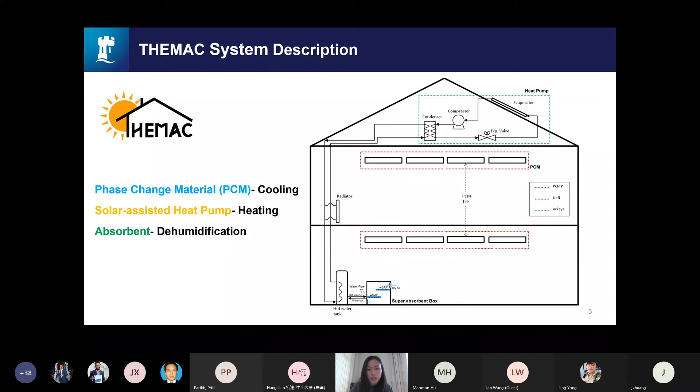And we have the super absorbent box containing the composite material to handle the dehumidification, and part of the heat generated by the solar assisted heat pump will be used to regenerate the absorbent. So the working principle of the THEMAC system is quite straightforward. It will be able to operate throughout the year.

In summer, during the daytime when the ambient temperature is high, the warm air in the building is circulated through the PCM panels. Hence, the heat from the indoor environment will be absorbed by the PCM cylinders as the PCM melts. In such a way, the PCM will enhance the overall thermal comfort in the occupied space by maintaining a steady indoor temperature within the comfort zone for longer periods, thus minimizing the time depending on the HVAC system and preventing overheating during the daytime, especially on hot days.

On the other hand, the absorbent will control the air humidity level of the building when dehumidification is desired. Throughout the day, the PCM will fully absorb the heat from the building. So in order to allow the PCM to work for the following days, at nighttime when the ambient temperature drops, fresh, cool air from the outside will be circulated into these PCM panels, causing them to freeze and release the stored heat from the daytime. Therefore, the PCM panels will become ready to begin the next cycle of absorbing heat again.

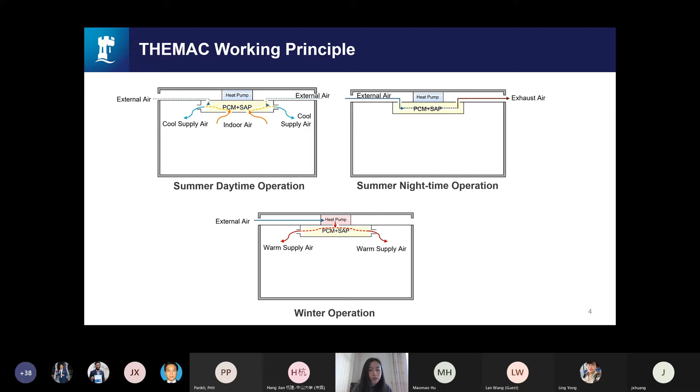So we firstly conducted research on the PCM material selection. Because the 3 key properties for any potential phase change material include suitable melting temperature, desirable heat of fusion and thermal conductivity, one of the key properties governing the initial selection is the melting temperature of the PCM. As stated in the literature, the suggested room temperature in summer would be 23.5 to 25.5 Celsius, and in winter it will be 21 to 23 Celsius.

As suggested by a lot of literature and research, the preferable phase change material melting point should be 1 to 3 Celsius higher than the average room temperature. So we consider the melting range of the phase change material would be 18 to 29 Celsius. This chart shows the market available PCM materials with melting temperatures in the range of 0 to 35 degrees. And because we have two phase change material manufacturers in our project team, we selected the material from their catalogue.

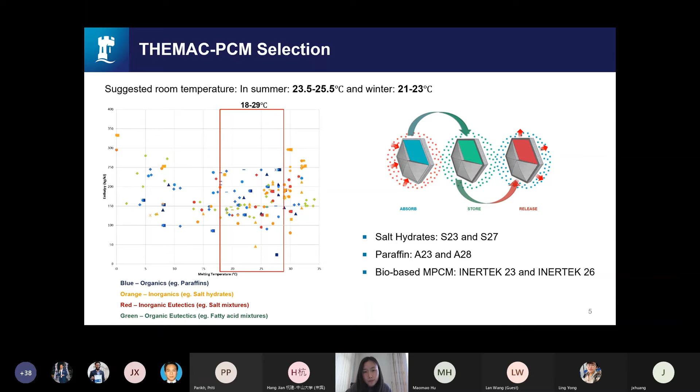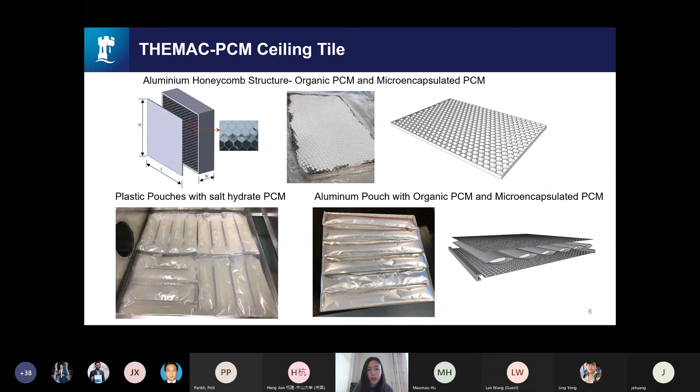So in terms of the PCM integration to the built environment, encapsulation is the common method. So we proposed and tested a lot of different designs to accommodate the PCM depending on their types. For example, we use the aluminum honeycomb structure to accommodate the organic phase change material and the micro-encapsulated PCM. And because the salt hydrate PCM is corrosive to the metal material, we use plastic pouches to accommodate it. And we also have a patented design called blister structure.

So it's similar to a medicine pill structure, but we filled the cells with the micro-encapsulated PCM, and then created a panel as seen in the photos. And the advantages of the blister panels are they are lightweight with more heat transfer surface area, and they allow flexible design and integration to the ceiling. And based on our testing, the blister panels did work to passively respond to the room temperature.

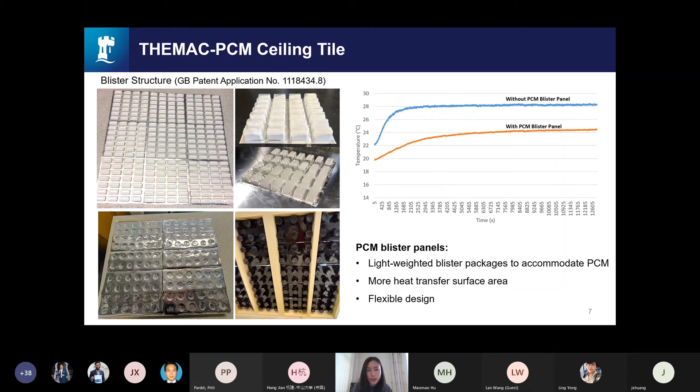And based on that blister design, we have finalized the final product design called ThinICE, worked with our industry partners, and here's the photo showing the overall view of the panel. So we use the HDPE module to accommodate the PCM, and then we integrate several heat transfer enhancement materials to improve the thermal conductivity of the HDPE module. And then we have designed it with more surface area, and it allowed the panel to be stackable into multiple layers, and 1 square meter would allow 8 modules.

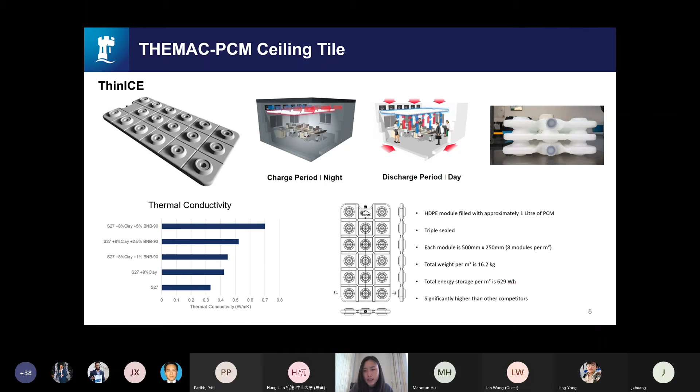So we have done several field tests using the ThinICE panels. For example, in one test, we use a small storage room and we place 14 ThinICE panels on the ceiling level to cover 25% of the ceiling area. And as we can see from the result chart, the room temperature would be stable and maintained at around 27 Celsius. And in terms of the practical application of the ThinICE panels, we can also apply perforated metal panels, like on the right-hand side, to provide a better finish and better look within the room.

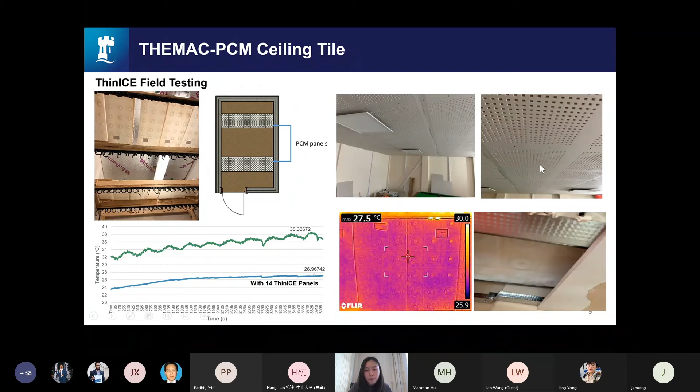And for the solar assisted heat pump, in our field testing, we aim to provide hot water supply coupled with underfloor heating pipes and the ThinICE PCM panels. So during our field testing in winter days, the heat pump was able to maintain high temperature hot water delivery above 60 Celsius for a period of 8 to 10 hours during the sun hours, and the energy would be stored in the ThinICE panels, and the space heating temperature during the daytime would reach up to 32 degrees, which showed a temperature differential of 28 to 30 degrees between the indoor and outdoor temperature.

And at night, the stored heat from the ThinICE panel will be released for the space heating, and the result shows that an indoor temperature of around 22 Celsius would be achieved during 12 hours.

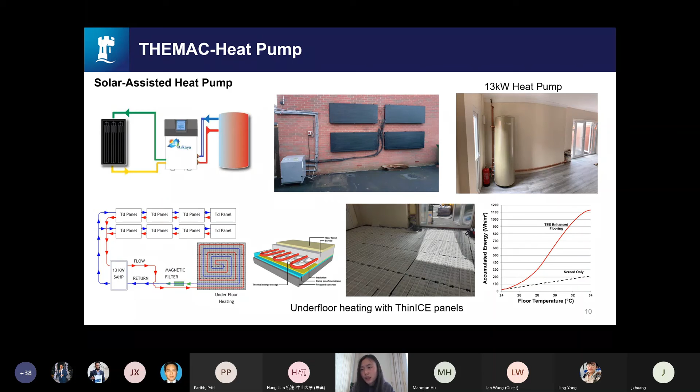Excuse me, Doctor. Yep. Yes, I'd appreciate it if you speed up your presentation. Okay. Thank you.

Yes. And then based on the testing data, the super absorbent could practically absorb the moisture from the indoor environment, and the hot water generated from the heat pump could reach up to 85 degrees, which is sufficient to regenerate the vermiculite composite desiccant.